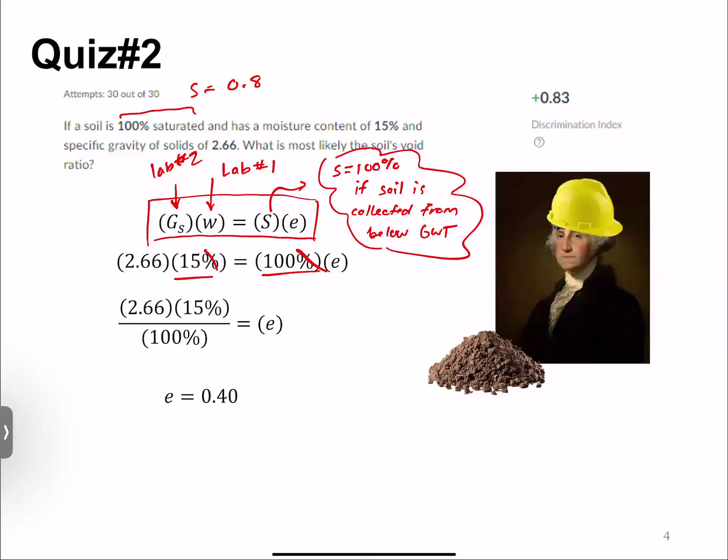Okay, so we're gonna wrap up what we talked about last class. Again, I'm just gonna put these here, but hopefully you've already filled this out. I don't know why that deleted it here. But we started talking about this range of void ratios here. You have a question? Yes.

So you were just saying about how different soils, after time, you may not have the same amount of filtration and stuff. When you take that core sample, is that really just to see the different layers of sediment, or actually how dense the material is?

Yeah, so it depends on the type of coring that you have, but there's different testing methods or different ways of retrieving soil out of the ground that will either keep the soil intact fabric-wise, to make it actually a nice representative of what it's like underground, or just pull it up so you can run a grain size distribution or something, one of these values that isn't going to change with disturbance, unlike compaction or void ratio. We'll get into that whenever we start talking about the subsurface testing techniques.

But your typical boring would not; you wash it with water to drill through it. So you're messing up the groundwater regime, you're messing up the soil fabric because you're essentially pressure washing the soil. So yeah, that's a good question. We'll cover that in a lot more detail in a few lectures.

So that range is important. We talked about the different correlations to that. And what I wanted to introduce is this theory here of what we call empirical relationships, which maybe some classes that you've gone over have used before, but they are really, really heavy in geotechnical engineering, and that's because geotechnical engineering is very site-based.

So empirical relationships take data from the field, from experiments, and then set some type of statistical correlation or statistical function so we can make a prediction based off of the data that we have. So this is really helpful, but there's a huge caveat we have to consider: this function or this empirical equation is only accurate or only proven to be worthy of use for the data that is training it, essentially.

And this is a whole thing too with AI, if you've ever gotten into that. The data that you use to train your AI model is one of the most important things. So this empirical relationship is only developed based off of these factors here, this data that they use.

So nowadays we're sharing a lot more data, we have communications and collaborators on all the different continents, and being able to share data, we can start to make some of these empirical relationships a little bit more robust or a little bit more applicable to various types of data. But it's always important to keep that in mind when you start seeing this.

Because geotechnical engineering is full of these empirical relationships. Hopefully you can start to identify them based off of these equation formats. They're usually pretty easy, pretty linear or a log-based equation. Yeah. The D50 and then the millimeters in parentheses, what are they both? Yeah. D50.

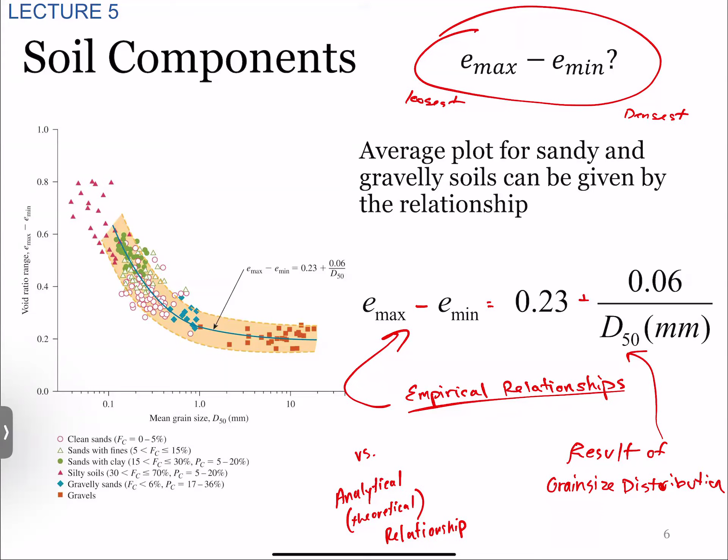All right, so that's where we ended on lecture 5 from Thursday, but we have a few more slides I want to go over. During the very beginning, when we were talking about a bunch of different types of parameters that we care about, I had mentioned submerged density. Submerged density is shown with a little apostrophe after it. And more so what we use is a submerged unit weight, which is the gamma prime here. The other way of showing this might be gamma sub.

And we use this when the soil is 100% saturated, and when the in situ soil is under the groundwater table. So submerged density, and effective density is also what it's called.

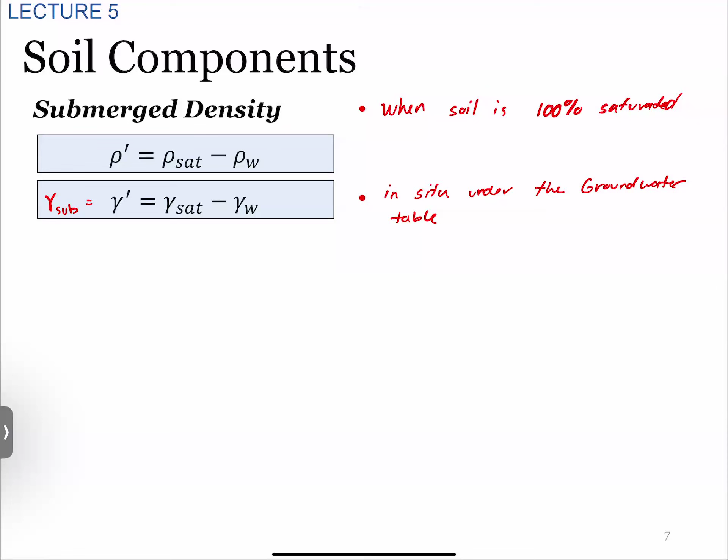It can be kind of hard to think physically what it means. The best way I can explain it is, okay, you have a bucket full of soil and then you fill up that bucket with water. So the bucket now is a saturated density. But then let's say you take that bucket and put it underwater. The perceived weight or perceived density from your standpoint, since you're underwater too, is going to be lighter, less dense, right? Because when you lift up stuff underwater, there's this buoyancy associated with it. So that's where this comes from a physics standpoint.

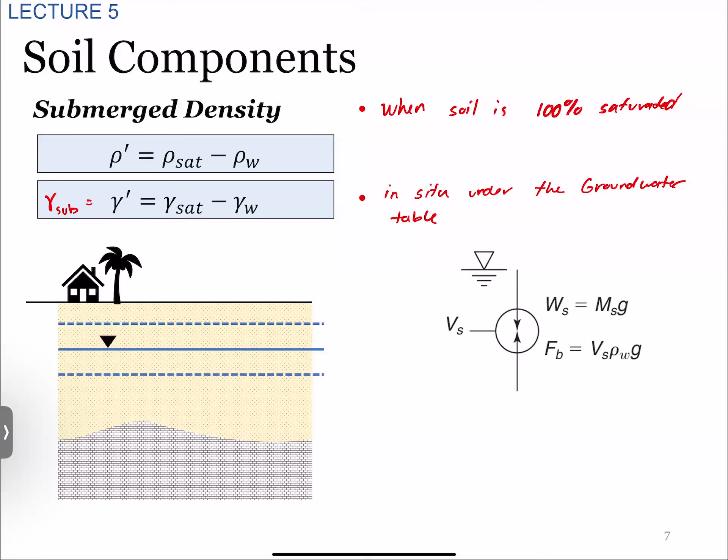We have this volume of solid, we have a buoyant force, and we also have the weight of solid underneath it. The reason why we would use this is going to be highlighted especially in the last month of the semester, so we're going to fast forward essentially. The whole reason why we would use this submerged density in our stress calculations, or why it's an important parameter, is because the groundwater table can potentially change. So long story short, we know that density is correlated to the strength of our soil. Remember I showed that little graph, density versus strength. So density is controlled by the soil weight, which then controls the soil stress.

So kind of what we were saying before, the frictional behavior of soil: the more we're pushing down on the soil, the harder it is to have those soil particles slide around each other. So if we are in a saturated condition, we see that the density of our soil is higher than if we were in a non-saturated condition, right? We know that gamma sat is greater than our gamma normal, which is greater than our gamma dry.

So the whole reason why we would use this submerged density is to account for the fact that maybe 20 years from now, or maybe even just a year from now, that groundwater table might change and might leave. And so our calculations are going to remove the weight of water just in case that water is no longer there. That's the whole essence of this. It's used to calculate something called effective stress, which we'll talk about way later on.

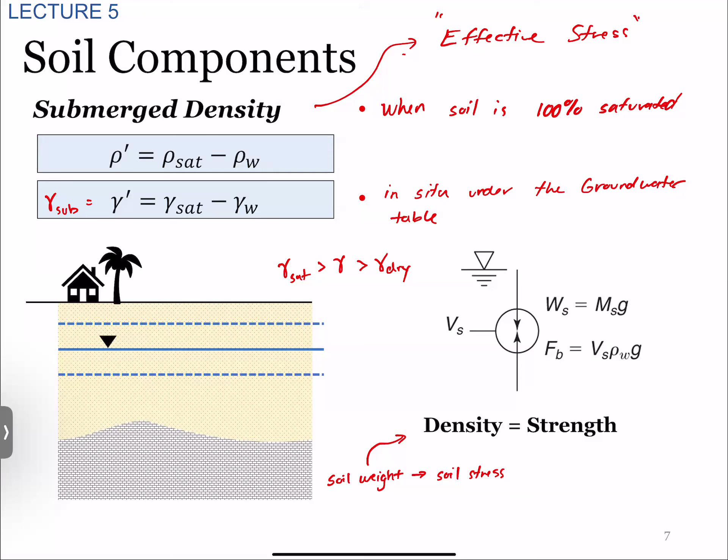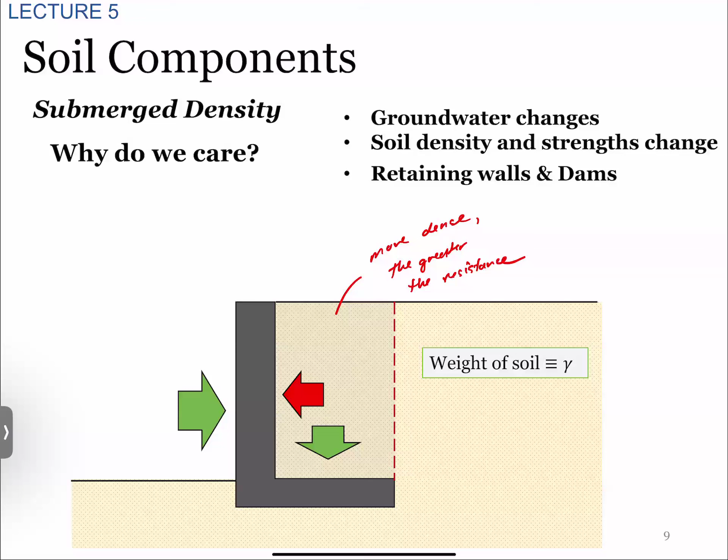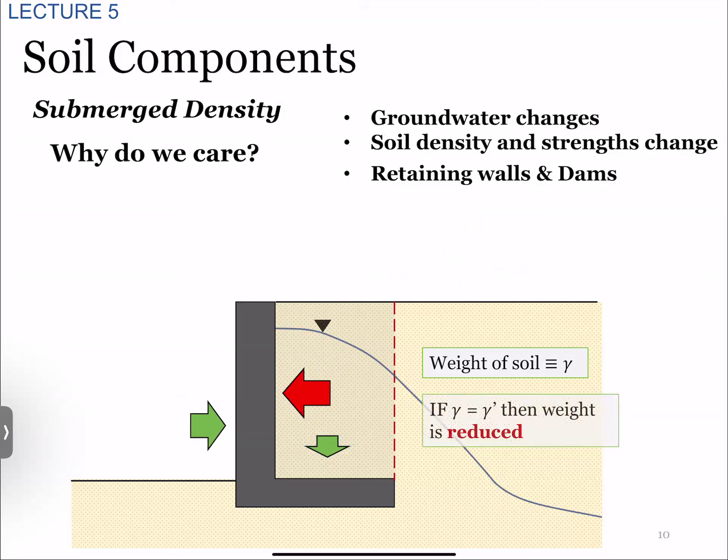So let's say we have a groundwater table or some type of ponding, or it rains and we have water buildup in this area. If we have this, then we're now going to use our submerged density, and the weight is going to be effectively reduced. So because of this, our resistance down here is a lot smaller. So if we designed for the case where the soil was wet and we have this case, then we could have failure because now this resistance is a lot lower.

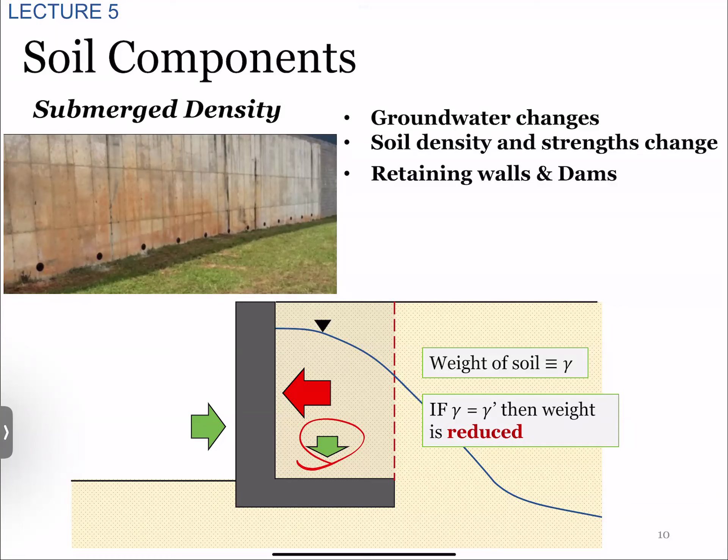So that's why you'll usually always see weep holes or some ways to ensure that water does not build up behind the retaining wall. Or if you don't have that, then you would design for the effective condition, accounting for the lower density of our soil. That's just a little example of that.

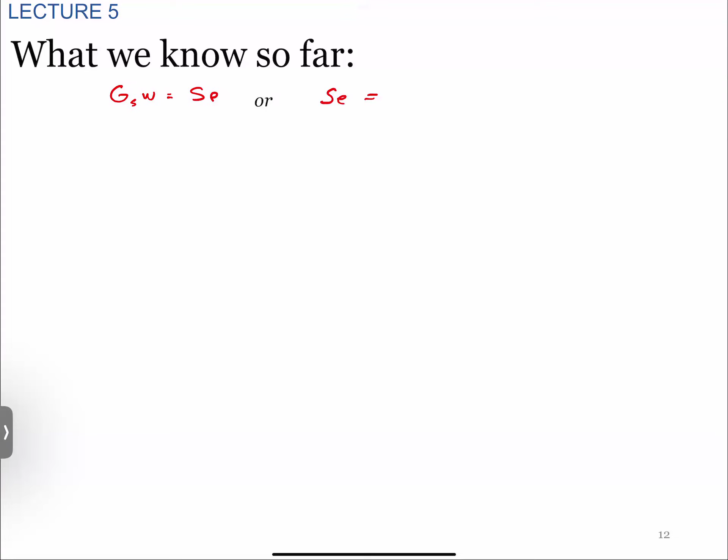Okay, so the last one that I want to talk to was, again, just recapping what we know so far, some of these really important equations. The first one being the one I already talked about ad nauseam, but it is very important. However way you remember it, please try to remember this equation.

The other really helpful one is the correlation for dry unit weight to moist unit weight. So our dry unit weight is equal to our moist unit weight, or unit weight with some water in it if you don't want to use the word moist, divided by 1 plus that moisture content. And the moisture content is in decimal form. So it wouldn't be 1 divided by 100 and something; you divide it by 1 point something. So you could rearrange this to solve for this way too.

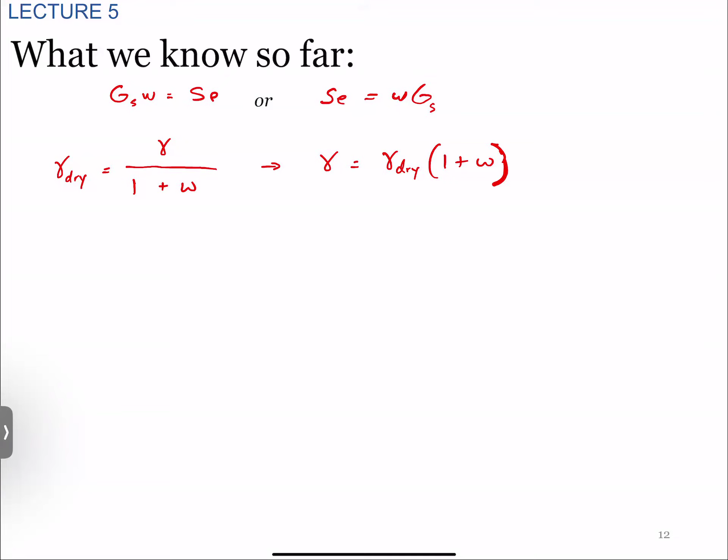The other one that is helpful along the gamma dry front is specific gravity of solids times unit weight of water over 1 plus our void ratio. So it looks very similar to the other one, but with different parameters. And let's say we wanted to combine these two equations. So we could also solve for the normal unit weight: 1 plus our moisture content times specific gravity times the unit weight of water, divided by 1 plus our void ratio. This is also a helpful equation.

And then the other one that is important is the saturated unit weight: GS plus E, all over 1 plus E. So I went over the derivations of these. I would recommend at least memorizing this one. These aren't critical to memorize, because at the end of the day, if you have your phase diagram filled out, you can easily find these individually. But these help for quick calculations in the field or when you start working as well. They're all related to each other through that phase diagram.

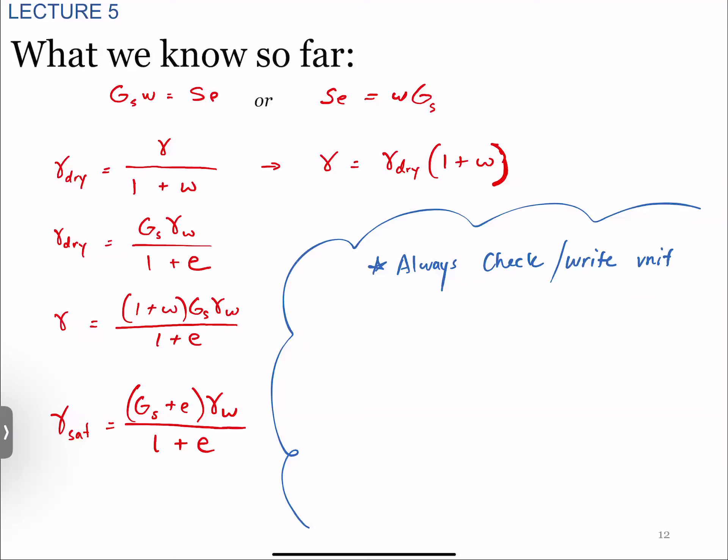So the things to remember with these: always check or write your units down. This will be the best way to ensure you aren't messing stuff up, especially when it comes to densities. I would recommend writing them in your equation and physically canceling them out to ensure your void ratios are in the same decimal form, you're using the correct unit weight of water, and your solution is in the correct format. Especially the unit weight of water, making sure you're using either 9.8 kilonewtons per cubic meter or 62.4 pounds per cubic foot. I see that mixed up all the time.

The other thing is remember that void ratio is in decimal form. Sometimes you'll see an E value being 1 point or even 2 point something. It's supposed to be in that form, so do not convert it to a percentage form. And also remember that moisture content is calculated in decimal form for these equations. So when we have moisture content in these equations, always divide it by 100, even though it's not shown in the equation.

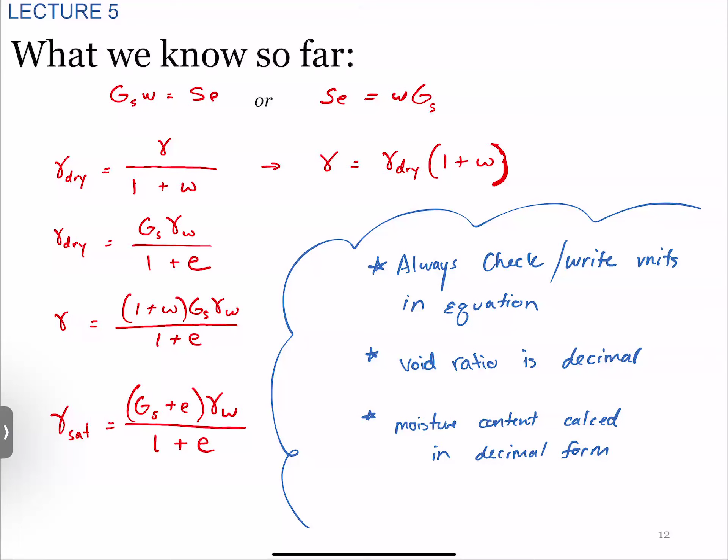Okay, so that wrapped up lecture 5. Now in lecture 6, we're going to talk more about the grain size distribution and what distinguishes the different types of material. So have you guys heard the word clay before? Yes. And silt? These are household words we've probably all used before. Maybe you know some of the differences from a composition standpoint, but we're also going to see how that composition changes the physical behavior of our clay, and the difference between clay and silt or gravel.

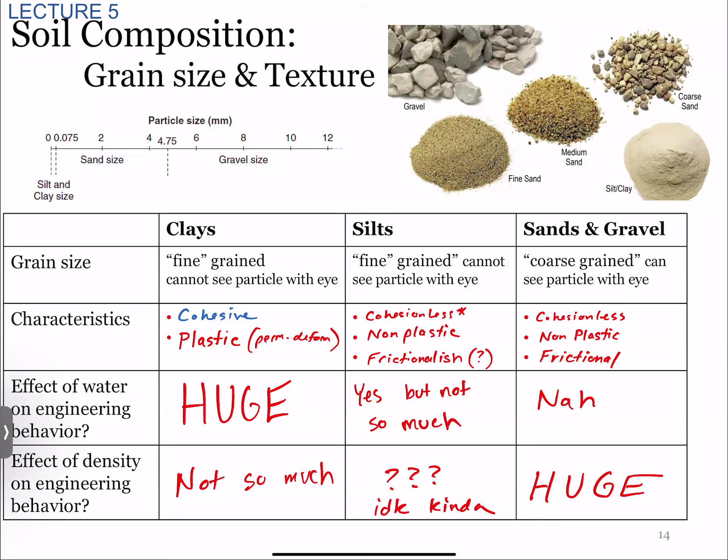One of the things we're going to start introducing here is the range of grain sizes. This is where we start looking into the classification of soil, and we won't get into classification until after exam 1, but I want to share a little bit. The Unified Soil Classification System is one of the languages geotechnical engineers use to define soil. You can communicate soil using other classification techniques, but this is just one of them.

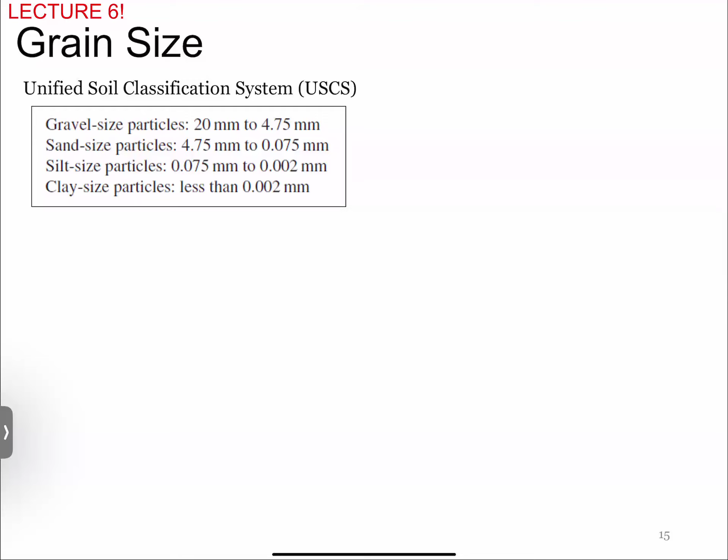So gravel size particles are from 20 to 4.75 millimeters. Sand size particles are 4.75 to 0.075 millimeters. Silt size particles are that range, then clay size particles are less than 0.002 millimeters. Since I have a computer, I can scale stuff. This is drawn to scale here.

If this gravel size particle is 20 millimeters on my computer, then a sand size particle would look like this. We can still see the difference here. The silt size particle is going to be really, really small. And the clay size particle, you can't even see it with respect to the gravel. We'll talk about this in the lab later, but this is an important thing to think about when talking about engineering behavior.

So if you have a bunch of particles this size, it's going to be a little bit easier to use math and physics and all that stuff to define and see how it's going to react whenever you apply a load to it. But if you have a bunch of stuff that size or that size, then it's going to be completely different mechanics-wise. Or let's say you have a bunch of this stuff covered by a bunch of that stuff.

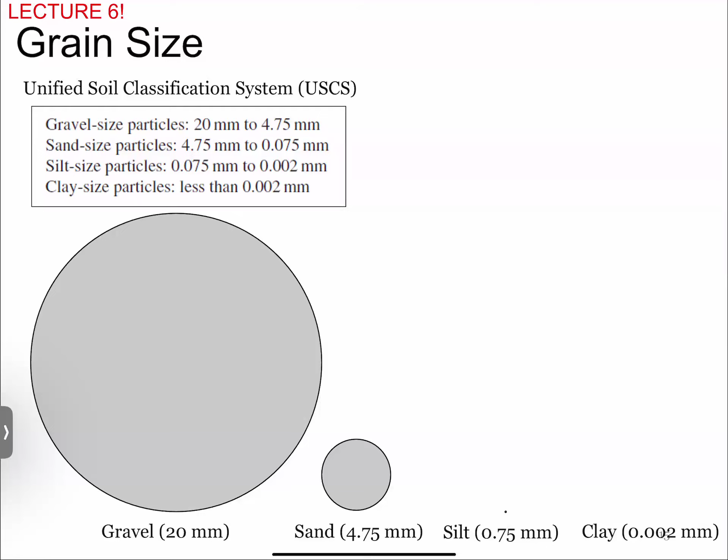Does that silt help the friction? Does it hurt the friction? Does the clay help it stick together? Because remember, we're dealing with mixtures of this material. So the way I like to characterize it, since a lot of us grew up in Florida and most people in Florida grew up with trampolines: if the gravel size is a trampoline, then the clay size particle would be a flea on that trampoline. So very, very small with respect to the gravel.

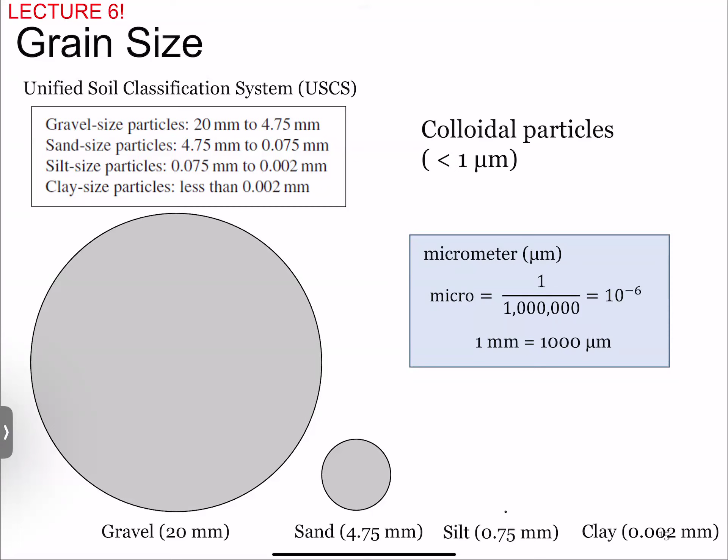Now, if you're not used to seeing these terms here, the micrometer, that's used a lot in this. Micro is just the inverse of a mega, so 1/1,000,000 instead of a million. And you also hear this term called a colloidal particle. That's something less than 0.001 millimeters. Now, there's not often times that we would care about colloidal particles because you're just getting into smaller stuff that doesn't really matter from a mechanics standpoint, but you might hear that term pop up too.

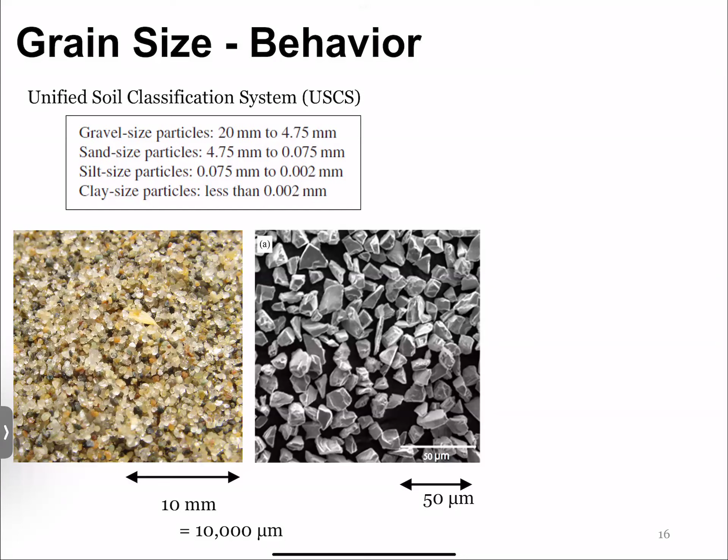So when it comes to the behavior of this, again, these little pictures show sand size particles, stuff that you can see, stuff that you can characterize. But when we start getting into some of the silts, it starts looking the same angularity, but much, much smaller. And I should have posted a picture of the diatomaceous stuff. This is just a granular silt, so it looks very similar, just much smaller. But when we start looking at some of the clays, that's when the structure of it gets really crazy.

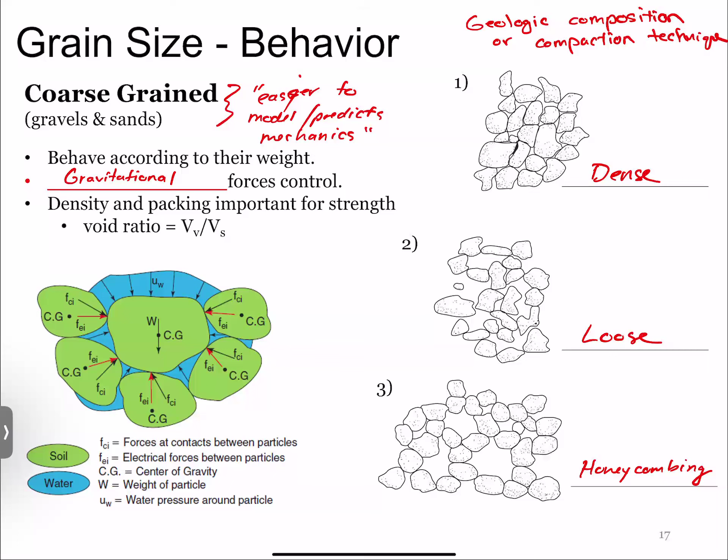So yeah, I don't listen to Joe Rogan or any of those people. I don't know if they talk about it, but the honeycomb shape is just a weird thing that you see a lot in nature, and even in inorganic soil, a lot of times our geologic formations will have this kind of arching established in it.

And essentially you see these little arches form. Now, in this case, we might have a very strong material in one direction, but it might be weak in the other direction. And so that's that fun word called anisotropy or anisotropic, if you guys remember that word. You guys heard that word before? Yeah. Okay. Anisotropic just means the behavior or the parameters or the material is different in one direction than in

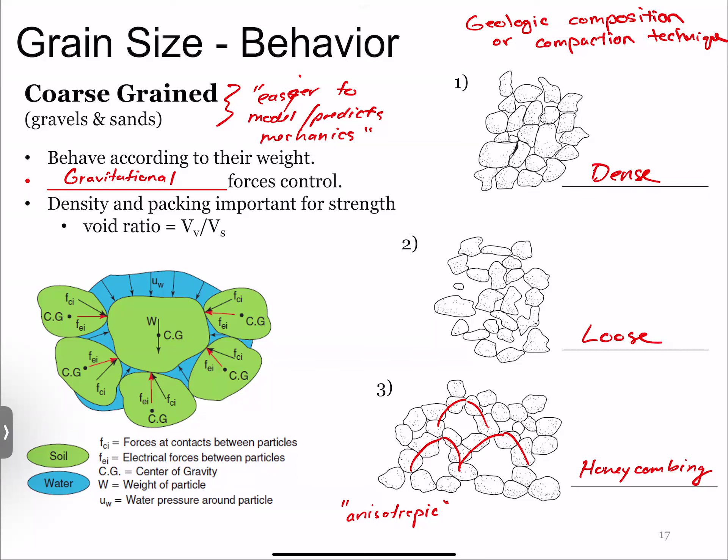the other direction. So you might see honeycombing in certain types of geologic formations, and that's also why this comes back to the geologic composition and understanding what is expected in that area. So the grain size for coarse grain is nice and easy. As I said before, they behave according to their mass. So the things that we will care about are the void ratio and the density. But these alone cannot characterize the anticipated engineering behavior. We also have to look at the structure and the angularity.

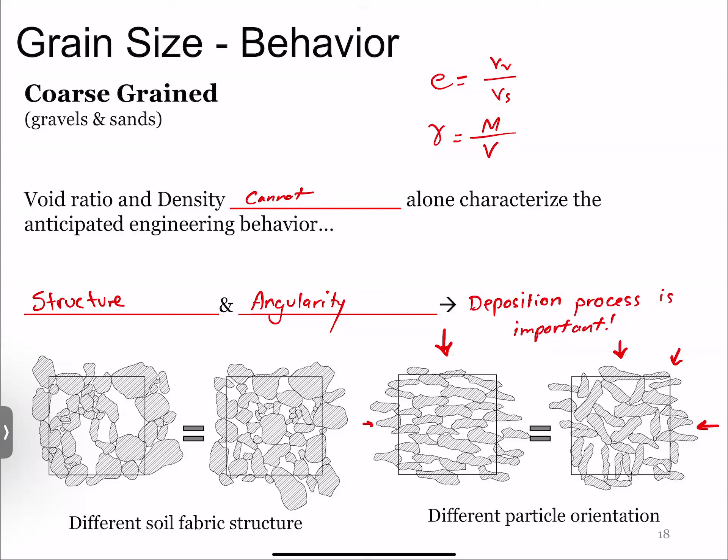Okay, so let's look at clays now. These are some beautiful pictures of some of those different types of clays. So the behavior of clay is completely different. It's controlled by the electrostatic forces, and hopefully you can kind of see why based off of this. The one on the right is a really cool one. That's a kaolinite. These are all imaged with scanning electron microscopes. You can't even image this with an optical microscope. You have to shoot electrons at it and bounce them off to get it that way.

But they're usually hexagonal, kind of weird, like tiny crystals, depending on the parent group. And then they're always stacked on top of each other like that. So this is why you have that plate-like behavior. You have a group of plates stacked up and bouncing off of each other. Gravel, sands, and silts are usually formed from physical weathering, like abrasion. But clays are formed from chemical weathering. An example is hydrolysis.

So that's why the mechanics are completely different and they're more chemistry based. So the clays are much more sensitive to chemical changes, especially in the water, climate changes, and the geologic deposition. As I said before, was it deposited in salt water? Was it deposited in water and now is dry? That kind of thing. Water has a bigger role in the grain size of clays.

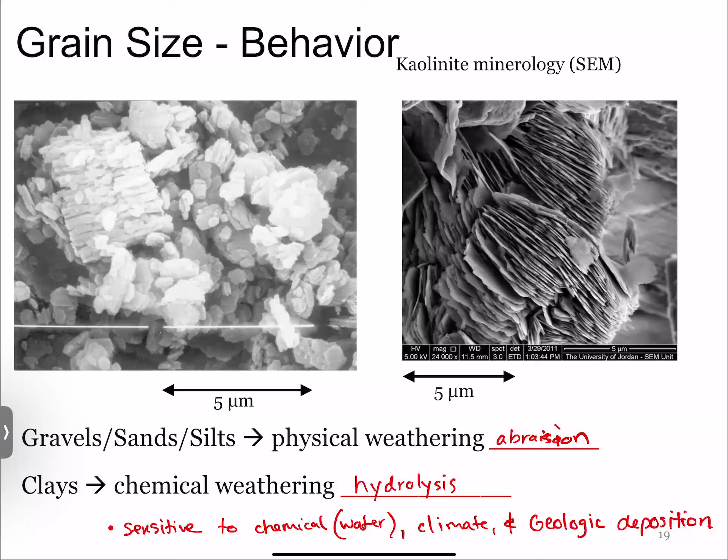So for the three of you who like chemistry, these next two slides are for you guys. So clay minerals are composed of these super fun words that will impress all your friends back home. Silica tetrahedra. Oh my goodness. What was that? See, PowerPoint was so impressed it messed up.

So tetrahedron, and then alumina octahedron. So most of our clay minerals are composed of these two things. So silicon, hydroxyl, or aluminum. And these are why they combine to form these different plates, and then these plates are stacked on top of each other. So you would either get a silica sheet or an octahedral sheet.

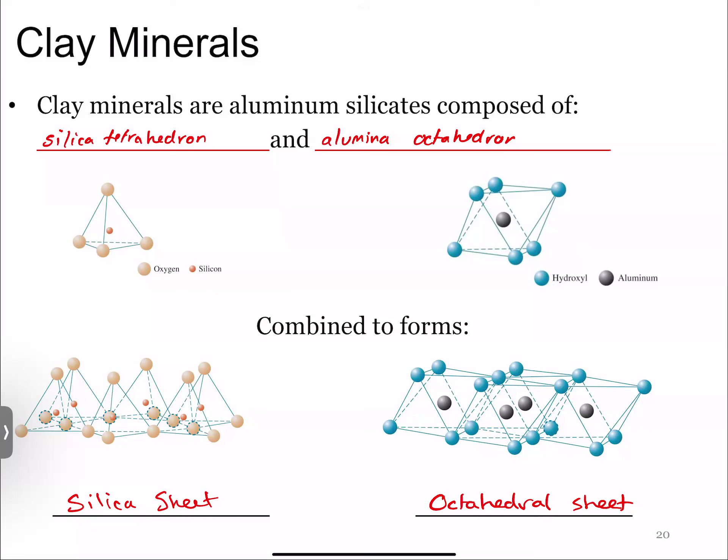So this is what is actually making up these plates, these two things. And hopefully you can see, based off of how this looks with triangles versus something a little bit more intact, how if you introduce other chemicals, or even just the structure, that might change based off of the orientation of it, you know, a slip surface right here where that might be a little bit more dense. So once we have these different types of sheets, then how they are attached together also plays a role in the mineralogy.

So this is kind of like a cartoon that shows three of the most widely found types of clays and some of the words we talked about before, like kaolinite, which is a silica sheet and then a gibbsite sheet. It's 7.2, what is that, atomic units, which is really, really small. So just for example, 1 millimeter is equal to, I'm trying to memorize this off the top of my head. Yeah, I think that's it. I might be off. No, I wrote that down. Obviously, you don't need to memorize that, but just know it's very, very small. That's 1 millimeter, and this is only 7.2 of those atomic units. So kaolinite is one of the most common types, and it's a very basic mineralogy.

One of my personal favorites, for somebody who grew up in the 90s and used the word ill a lot: illite is a good one. That's connected with potassium and it has a little bit more structure, right? And then the other one we talked about, that's a mouthful, montmorillonite. Now, all of these are just big words for right now, but what I want you to look at is how these are set up, and how that affects the behavior if site conditions change.

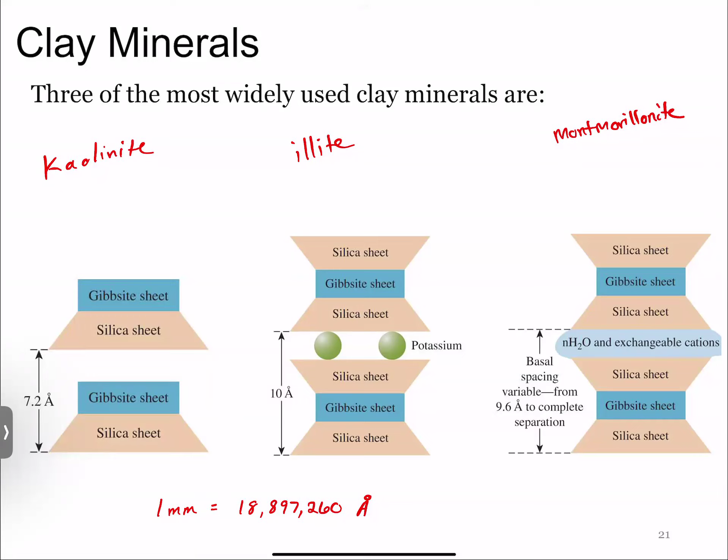Again, it doesn't matter exactly all these fancy words, but in the industry, when you hear montmorillonite clays, you usually think of a swelling clay; kaolinite clay, you think of a very easy, basic type of mineralogy; and illite, something that could potentially be reactive. So if you're in that industry at all, you'll hear these words a lot.

So why this matters: it is often assumed that once clay is saturated, it stays saturated. So once the degree of saturation of clay is 100%, say it was deposited in an ocean, because of that attraction, even if the groundwater table decreases, as long as it's not placed in an oven or left outside at the surface and desiccated, we usually assume the degree of saturation of clay is 100%, which makes the math and mechanics a lot easier.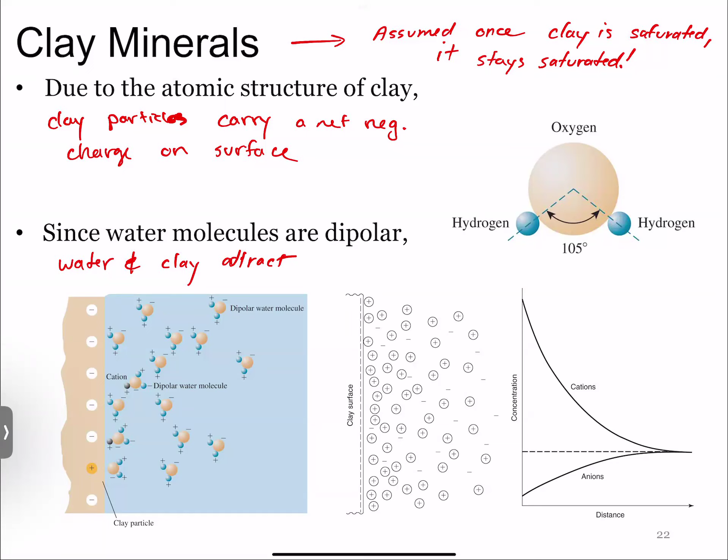Okay, 2 more slides here. So the whole thing is, again, thinking like, yes, we are talking about clay particles, but also we're talking about particles being combined with other things too. So the clay particles, like I'm sure everyone wants to impress their friends with that trick at McDonald's. But you know, that's essentially what clay is doing whenever we are adding water or changing the water.

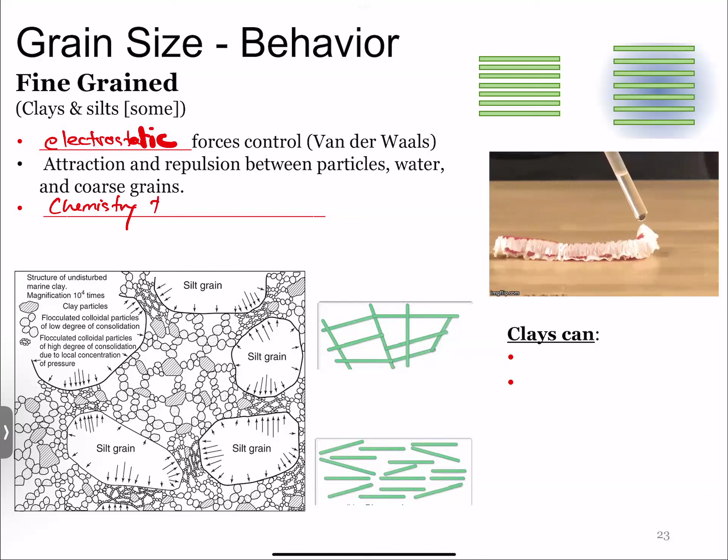So for clays and some silts, it is all electrostatic forces. All right, I don't know why that happens. So therefore the chemistry and the pore fluid is important, or is critical, especially when we think about this clay being mixed in to some of the other materials. So if we have sand mixed with clay or silts mixed with clay, and we add water, then that clay can push up and cause some of the silt or some of the gravel particles to move around.

So clays can either swell or shrink with water. So we can actually have swelling clays in Texas, Louisiana. This is really common where you build all these houses on clay in the wintertime, and then whenever the rainy season comes, the houses all get pushed up because the clay actually swells and increases.

But also what we can see is they can change plasticity, or they can change the mechanics based on moisture content. So that's the important thing to remember with clays, and that's why we have experiments just to characterize clay based off of how the increase or decrease of water changes its behavior.

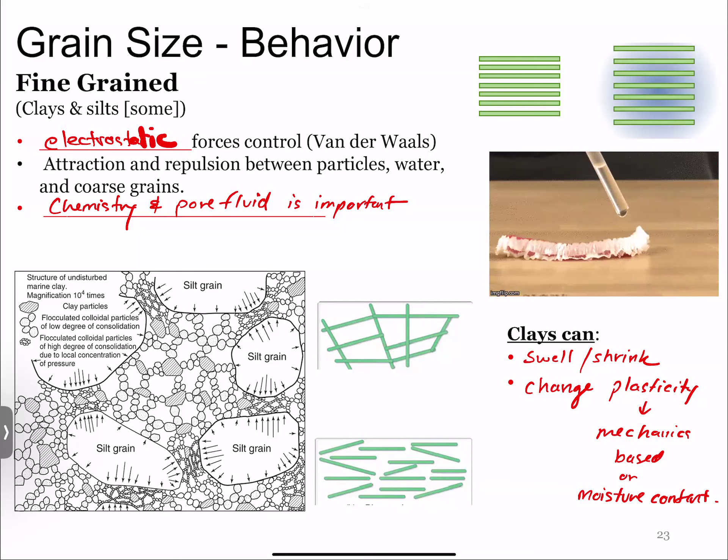So this last slide kind of shows a little bit of this. One important parameter with clay is clay sensitivity, and this has kind of an example of that quick clay. So for example, this is a little cartoon of the clay deposited in fresh water versus salt water. So a lot of times what we'll actually care about is the clay sensitivity, which is shown by A. I don't know why.

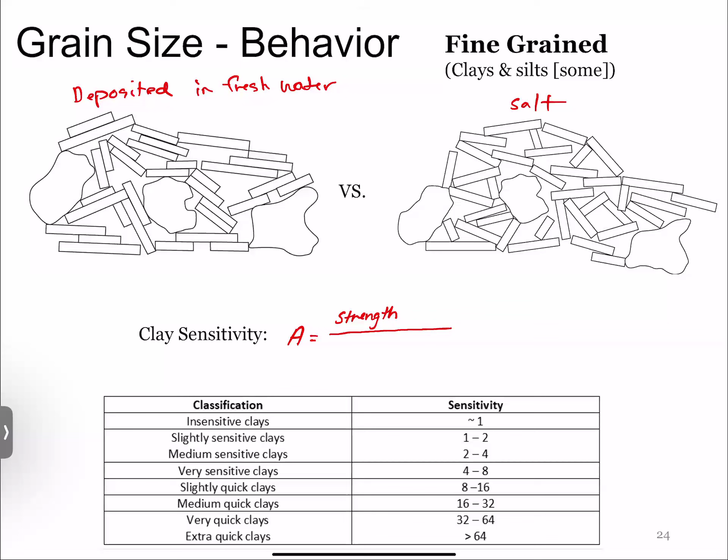So what we do is we test the strength of the clay, or the cohesion of the clay, in its natural state. And then we divide that by the strength when we remold it. Remolded means we put it in the form that it originally was in.

So the way to think about this is, let's say you buy a fresh new thing of Play-Doh, right? And we all are getting the nostalgic smell of Play-Doh in our mind right now. So if we pull that out right away and then smush it, we see how much it takes to actually smush that Play-Doh. And then we take that Play-Doh and remold it back into the container, and we do the same thing over again and smush it again.

The difference in that, or the percentage: the first time would be the natural state, the second time would be the remolded state. And that would give us insight into how the clay is deposited. Because once we mess up the fabric, will it retain its strength? This is a very common thing you might hear people say.

Down here, these extra quick clays. You remember that Norwegian landslide we were talking about, the extra quick clays. This is where it's very strong in its natural state, but as soon as it is remolded, or as soon as it gets messed up, it loses all of its strength. And then we have those crazy landslides as a result. So this is one of the ways we characterize clays. We'll talk about some of the others, and also get into some of the stuff for our exam in our next class.

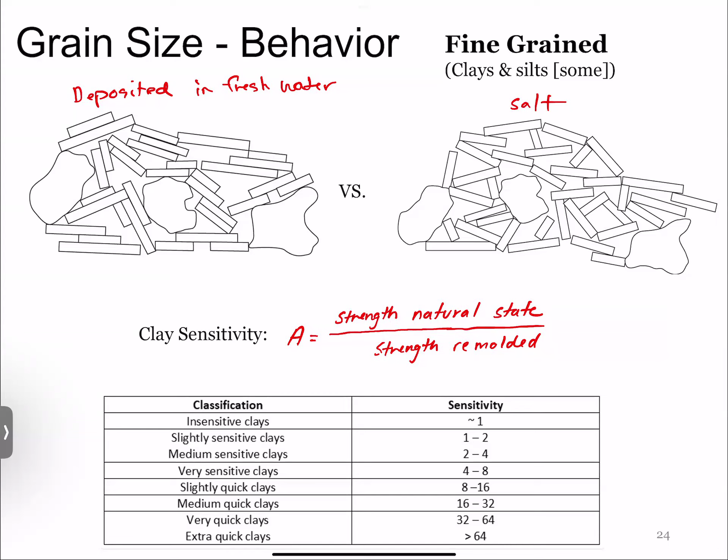So that is all I got. I will post these videos too. I forgot to include those in there. They show some good examples, more information on the Norwegian quick clays and why that happened, as well as how the behavior of the sand particles will affect it.